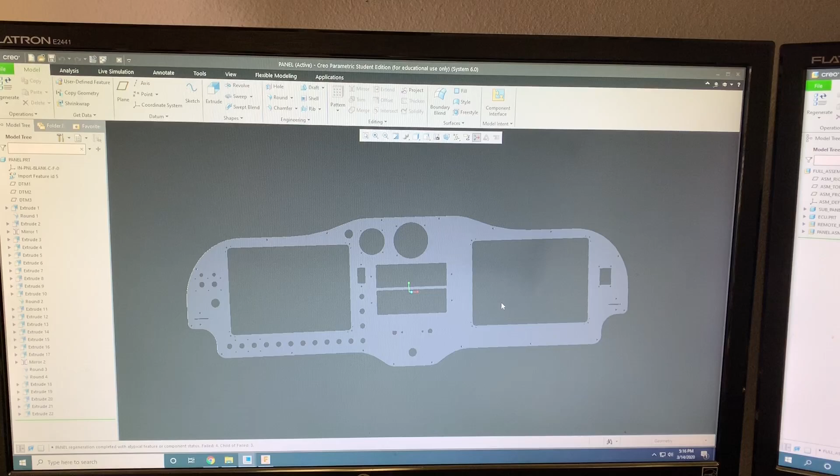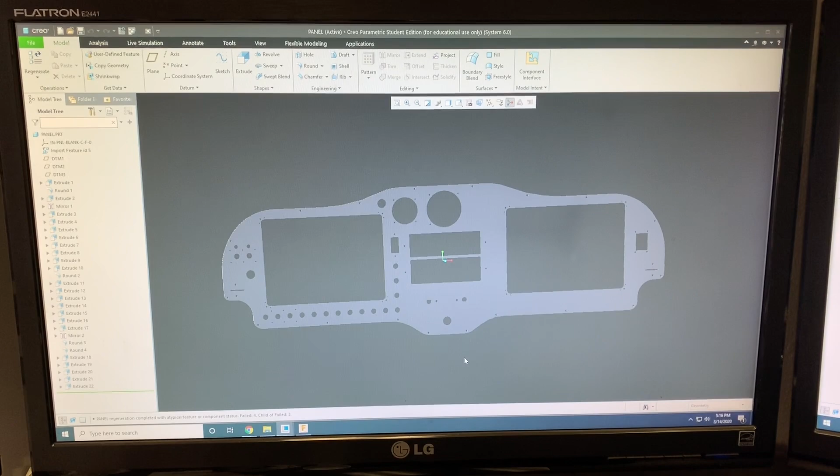Okay, so today is Saturday, March 14th. I know I said in the last video I was going to start painting the interior of the canopy, but I figured it was better to finish that remote mount avionics rack, and to do that I needed to start designing the layout for my panel. So I spent some time in CAD, and basically this is the result.

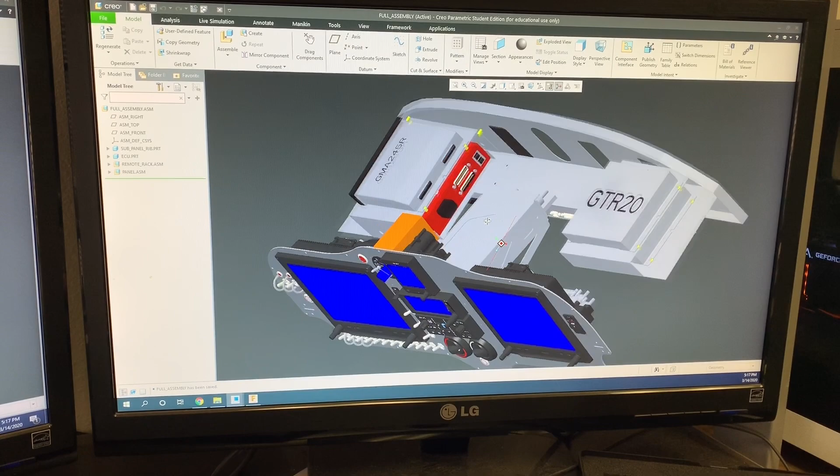I needed to figure out where the GMA was going to sit hanging back here, and how far in I can move these comm radios. That was basically the whole point of it. So I had to model the sub panel, my shelf, and each one of the components, and I think it came out pretty good.

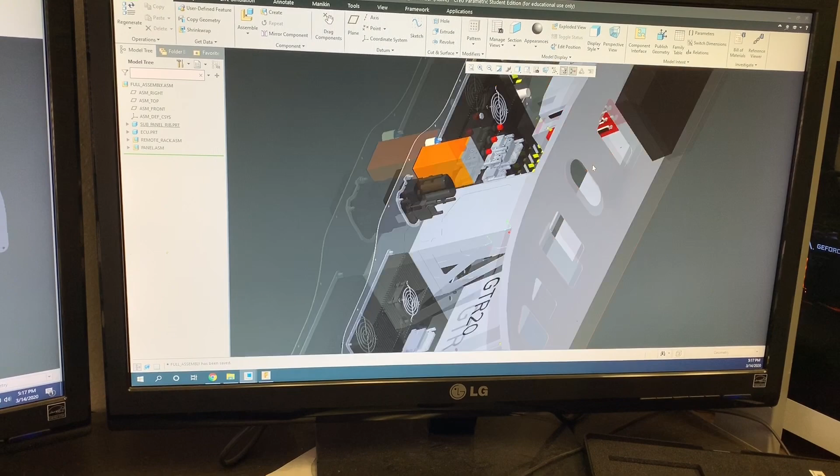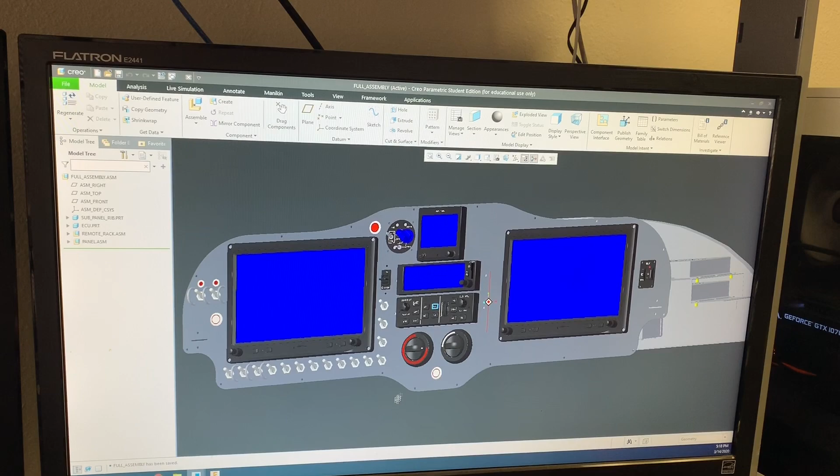Basically this is what I'm working with for the preliminary design of the panel. I know there's a couple things missing - a couple breakers, even though there's a VPX, there are still a couple breakers that need to be put in. This process has been super educational for me, just learning about each individual component and the proper components to put on the panel.

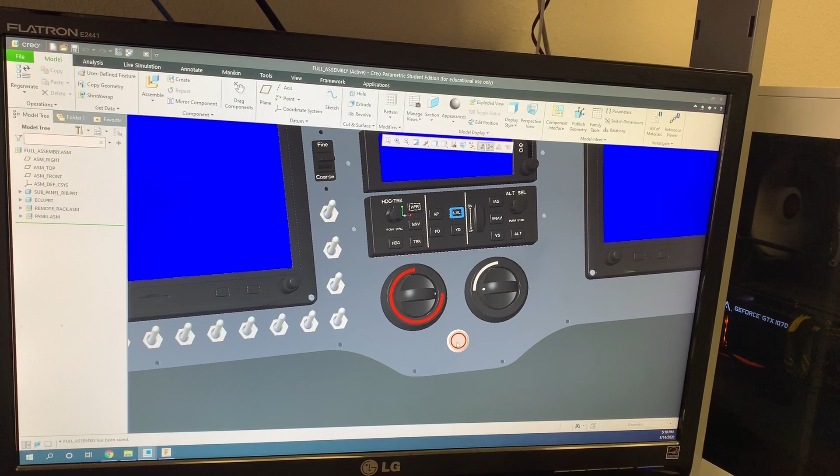For example, this is going to be my TOGA button, and that needs to be a double pole momentary button. That's actually not easy to source. I've been looking around for one. If anybody has a good source for a nice looking double pole single throw momentary push button switch, I know it's kind of specific, but I'm all ears.

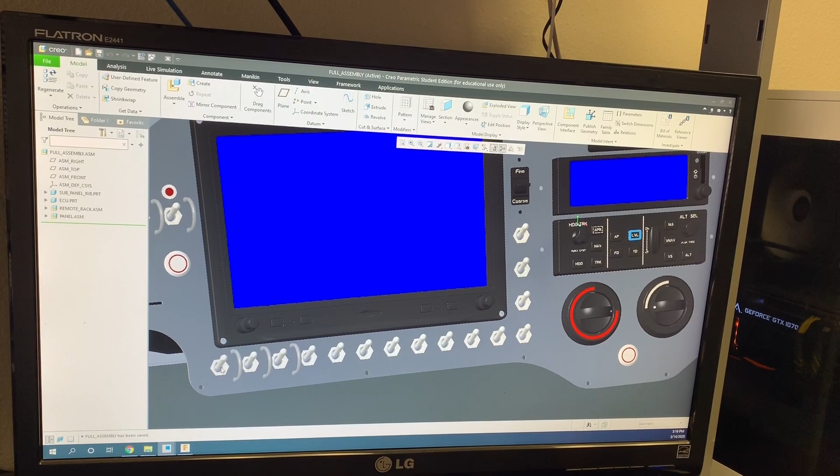Also, the ECU backup switch needs to be the same type, but not momentary - double pole, single throw. Single throw just means on, off, and double throw would be on, off, on for two different functions, and double pole means it's switching two units.

Anyway, I was able to source some of the stuff and I'm playing with ideas for a push start button here rather than a key, and hiding another switch to allow this to be activated, which helps a little with the anti-theft component. Anybody who's been watching my videos knows as of now I've got like 6 keys to operate the plane, so I don't need to add any more.

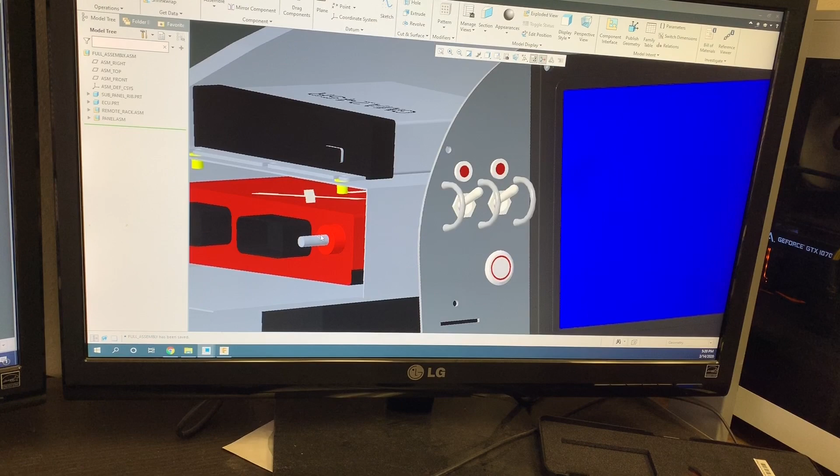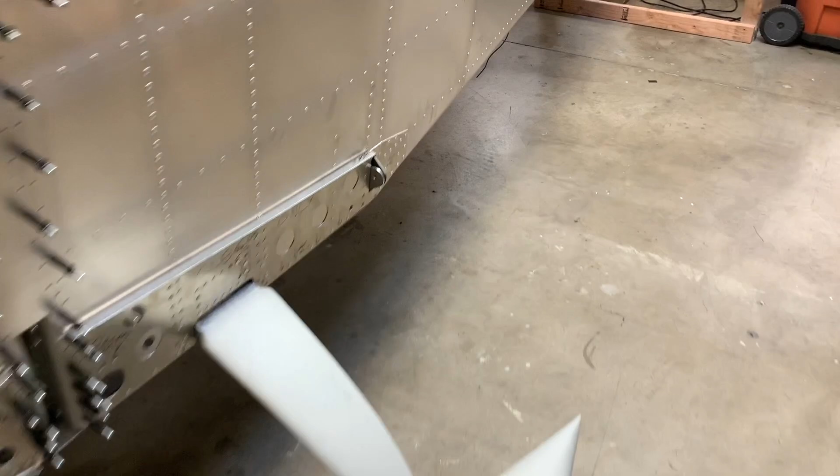So that's what I got done, and that prompted me to come in here on Saturday for a little bit of fun stuff. Basically, I was able to build out my remote rack here.

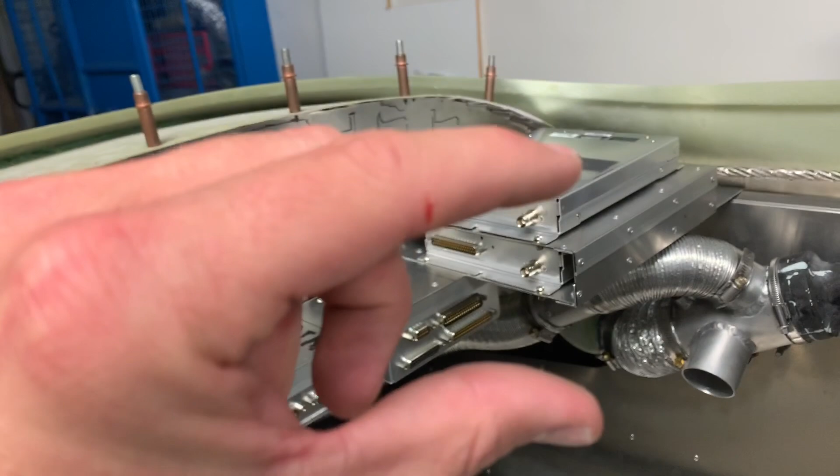Now everything's fitting properly, so I put the front skin on just to double check. There's plenty of clearance between my intercom thing here, and got those radios put in. All I had to do was condense the gap slightly, bring them closer together, but you can see there's still clearance, and also bring it in maybe an inch. Everything's looking good there.

But the real fun part was I mocked up a panel. So here's what I've got so far. I learned a couple of things along the way.

I don't actually use my router on aluminum very often, so the feeds and speeds and tooling for that was a bit of a step. Routing aluminum is not really a glorious process - it throws chips everywhere, but anyway.

Basically I've got these switches fully mounted out, because to make them flush like this you have to tighten from the back, and that's just a pain. These holes are for switch guards - these will be fuel pumps, lane A, lane B, and their lights, and a warning light here.

I think it came together pretty good. The racks for these have countersunk holes mounting outwards which end up going through the rack, and then I cut this support brace out here, and it goes through the rack, but no countersunk screws really fit, so I can only fit them in on one side. On the other side, for now, there's no screws.

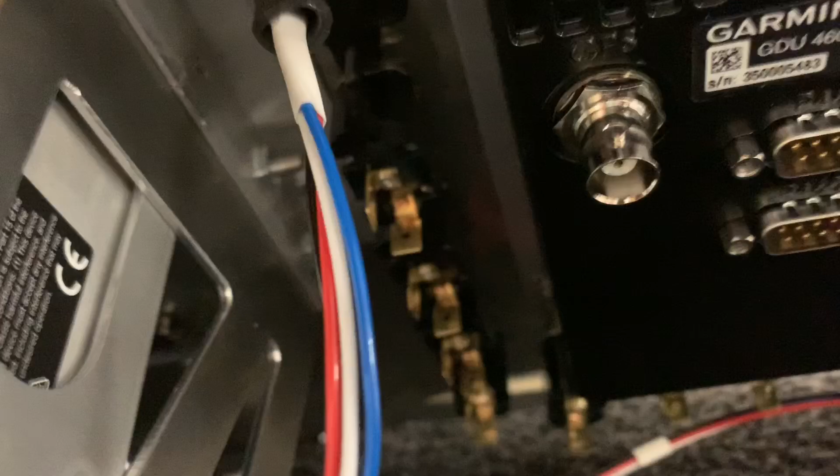I'm not really sure what kind of screw is supposed to be in there. Maybe a rivet, because they've got a flatter head. I guess that's what I'll try next. But yeah, it's coming together.

The next couple things I get to play with are - and like I said, this is just a mock-up test panel, it won't be my final one. There's a couple holes missing. The final one, of course, I'm not sure if I'm going to anodize it yet, or powder coat it, or

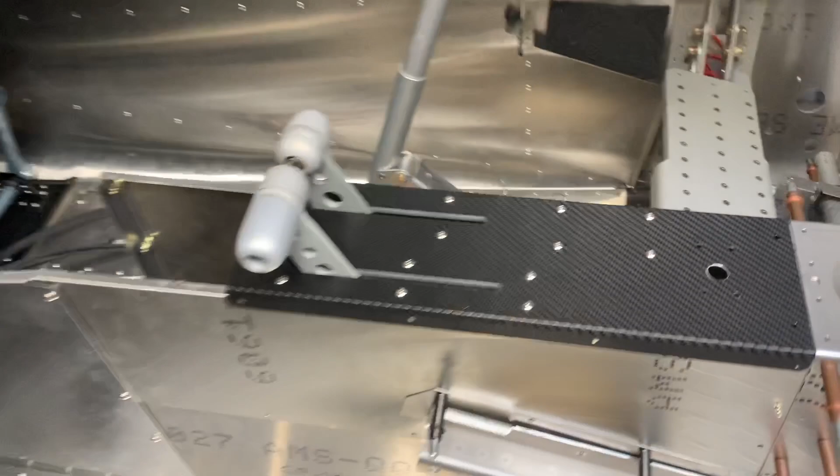use this kind of carbon fiber vinyl wrap. This was my original plan, but I need to be able to use the router to etch through whatever I put on top of it to label everything. I sold my laser recently. That's kind of the next thing I'm going to get to play with here.

Now that the panel's cut, I'll pull all the avionics out and start messing with maybe putting that vinyl wrap on it, see if my router can etch through. I have a feeling the adhesive will bind up in the tool and not leave a perfectly smooth engraving, so I may just have to - I know a laser would work perfect for that. I should have done it before I got rid of my laser, but I'm trying to downsize the things I don't use before I move.

So I think that's the update for the week. This was pretty rewarding for me. I know it doesn't look super exciting because it's just bare aluminum, but it was a fun process, and I got to feel how everything mounts together and get a better idea of what I need to do to improve it for the final design.

I'm waiting for my start button to come in, and like I said, I couldn't find a TOGA button that looks good - they're always these big protruding ugly switches.